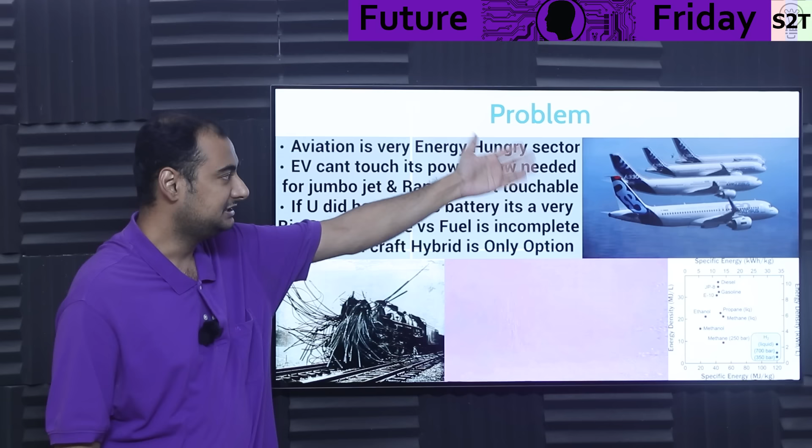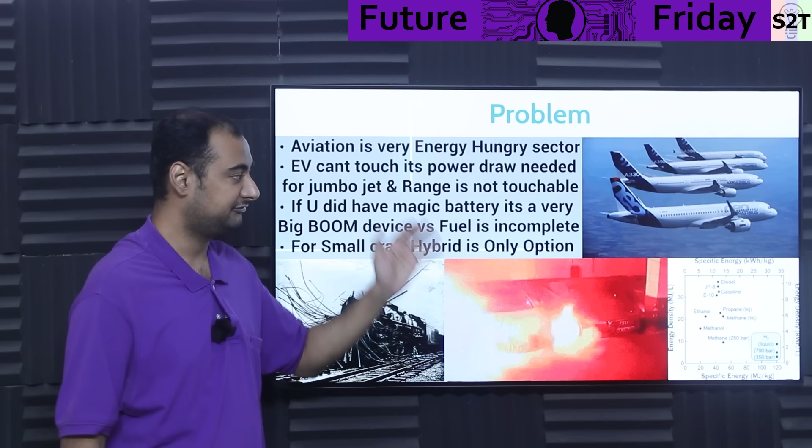These puppies are hungry puppies, meaning they consume energy like there is no tomorrow. Specifically the Airbus A380, it draws so much energy. As of now, electric vehicle on paper cannot even touch this. Meaning if you made it, it will not take off because it will be too heavy. And if you made it light enough to take off, it will not have the range.

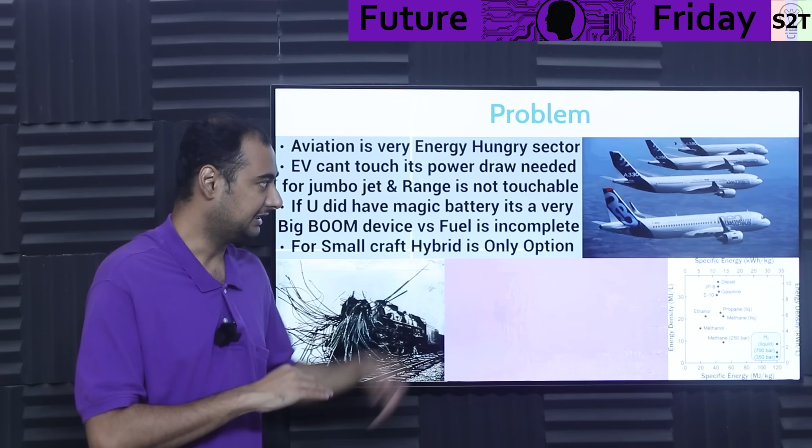So under the known laws of physics and under the known chemistry, as of now, 2025, if you try to do this, it's a nope. You do not even waste time on it. So let that be very clear.

Now, many people will say, what if future energy happens? But here's the deal, you have to understand. Fuel is very energy dense, ludicrously energy dense. The reason we don't go kaput every time we use fuel is simply because it's a half component. You must have studied this in school. Fuel is not complete, it requires oxygen from the atmosphere to work.

Now how do we get that oxygen? Well, we don't get pure oxygen, that's another safety component. Not only is it half, the oxygen is not pure either, you get it submerged in nitrogen. That's why using combustion with fuel is safe enough, even though the fuel is bonkersly energy dense.

How do we know it's bonkersly energy dense? If you put it with liquid oxygen and test it, it becomes a rocket engine. We know it has more than enough power.

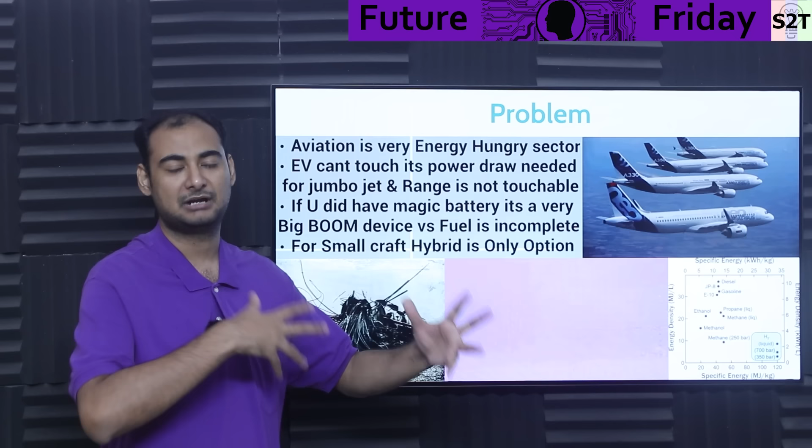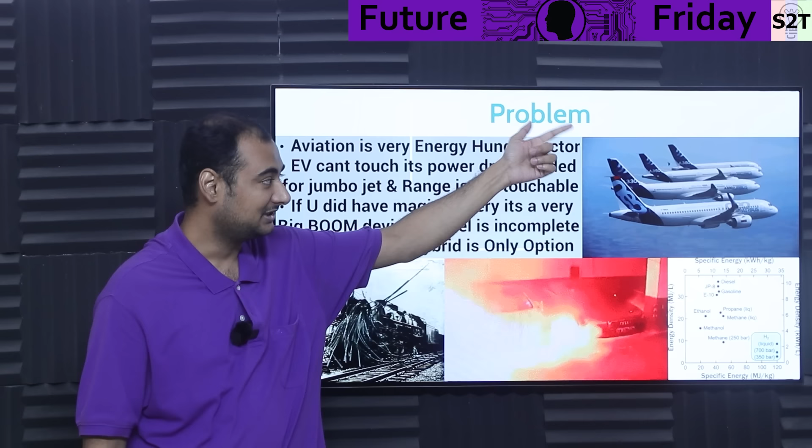Now, whenever you are talking about a magical battery, let's just say quantum capacitors, it will require twice the energy density of fuel. Why? Well, fuel gets lighter as you use it. For example, Airbus A380 can lose upwards of 150 tons, or actually more than that, while it's traveling on its long distance flight. Let that sink in.

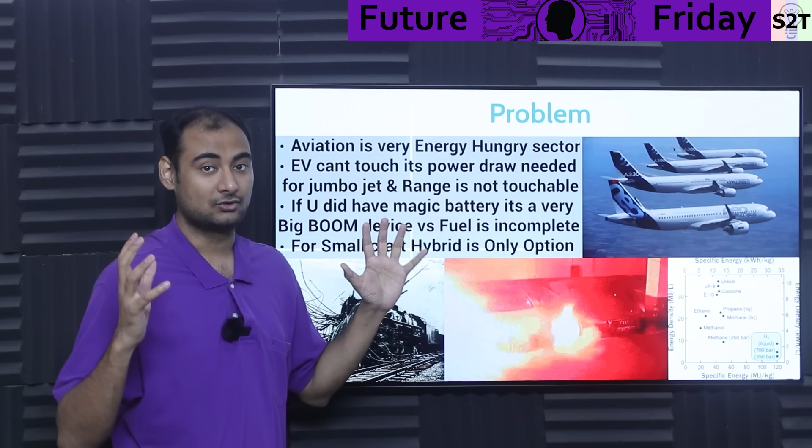This puppy will take off and it will lose 150 tons and then it will land, like, I'm so light. That's the reason why those planes can fly. Batteries do not have that luxury. So if you have to compete with Airbus A380 in terms of its raw capacity and range, it needs to be 2x. Fundamentally, if you can find something that has that kind of energy, it's a very big boomy device, and it's under the known laws of physics.

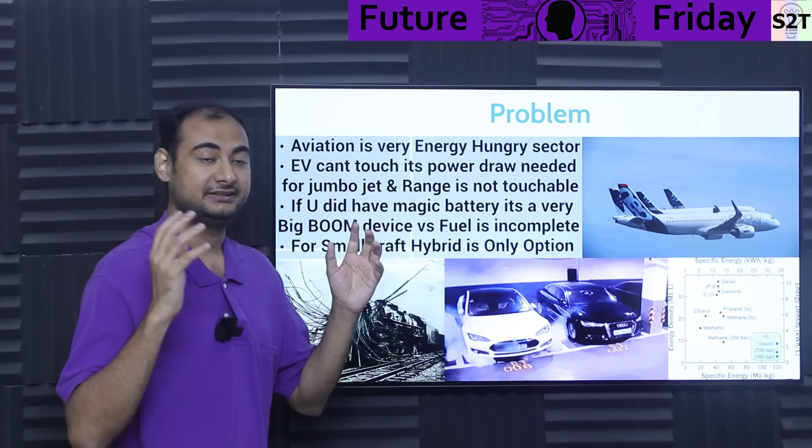If you have so much energy crammed into a small place and it has both components needed, any minor inconvenience will become a boom event. That's why fuel fires are actually manageable by firefighters, but they can't do anything about electric fires, even though electric fires have much less total oomph. It's just that you can't cut oxygen, it has its own oxygen.

It's like, I got this, I will burn, I'll burn underwater, I'll burn for a month. Not even joking. So be mindful, we have learned this the hard way.

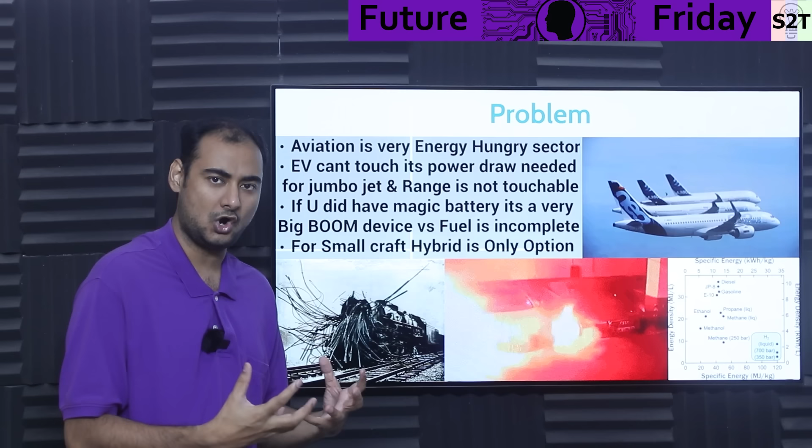Steam trains, right? There was an era, like late 1850s to 1890s, where things happened and people were like, whoa, let's put more pressure, more pressure. They became so dangerous that certain accidents wiped out a station. And it's steam, it's not nuclear, it's steam, but that's the whole law of physics.

The more energy you cram into a position, and the more it has every component that it needs, the more unstable it becomes. So if somebody in future makes a battery like that, I will be like...

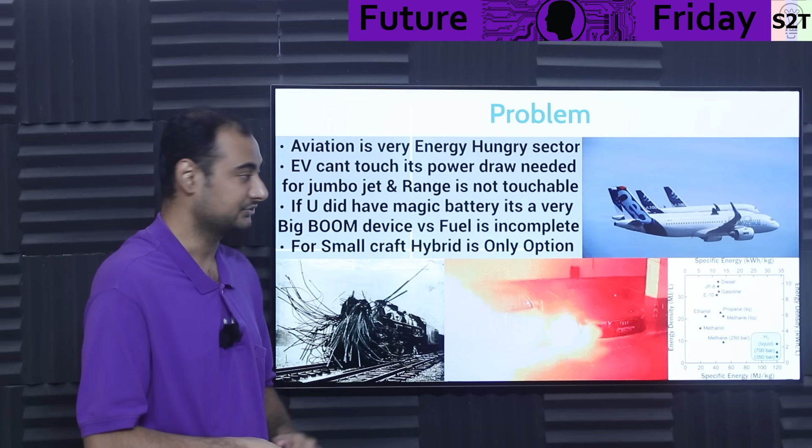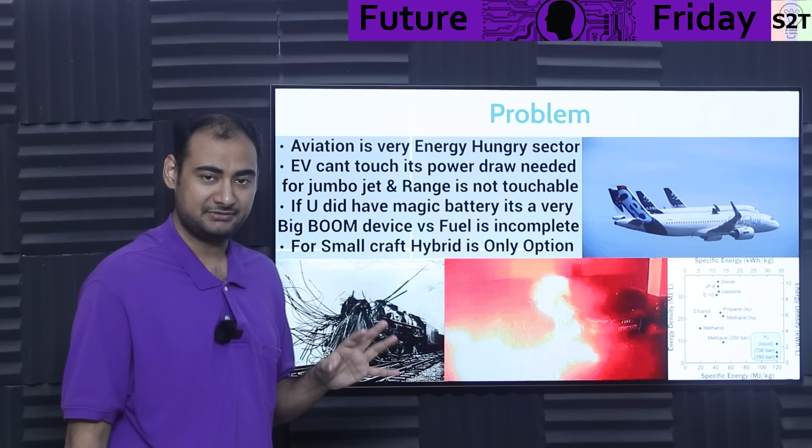So fundamentally, as of now, for jumbo craft we can't touch these things, they're so fine-tuned, don't even think about it. But for commuter craft, basically craft made for regional travel, those we can touch. But again, electric does not have range. With hybrid, we can take care of it.

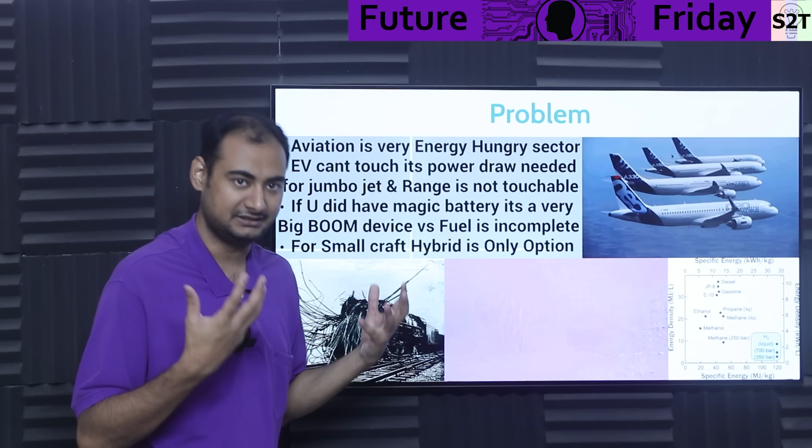Is that statement scientifically accurate? Yes, factually true. You just don't carry things in kilograms, you carry things in liters. How do you think fuel tank capacities are measured? How is fuel tank capacity on a CNG measured? How is fuel tank capacity measured in a hydrogen tank? It's always in liters.

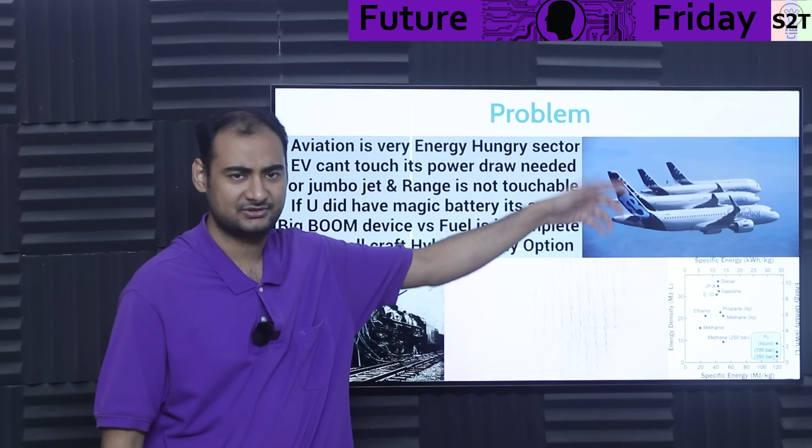So now if you compare that 1 liter, let's say I give you the best hydrogen, which Airbus is trying, not because they want to, but because the European Union said they're gonna ban hydrocarbons. So they're using liquid hydrogen. That has 8 megajoules per liter. That's it. And how much do you have with petrol, diesel? Above 30. JP8 is like around 30, 35. So don't worry about it.

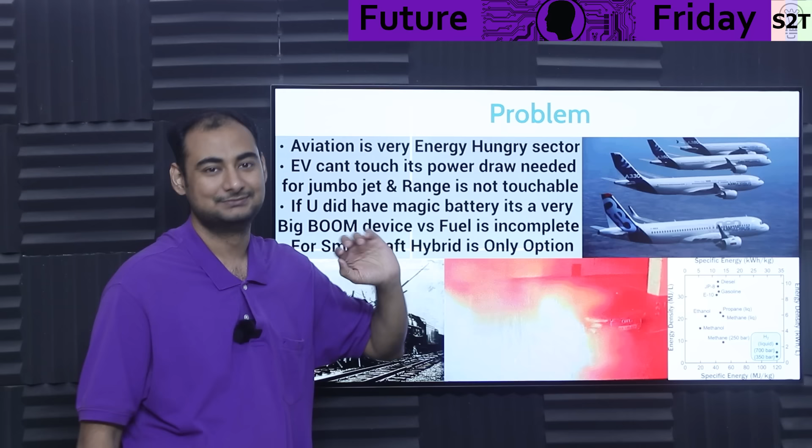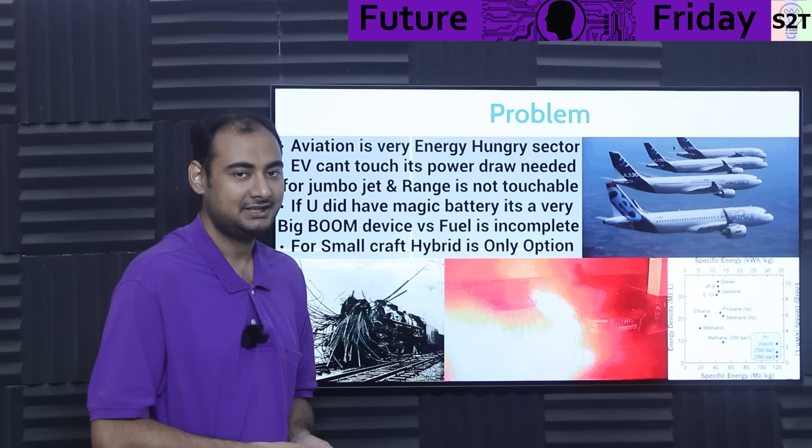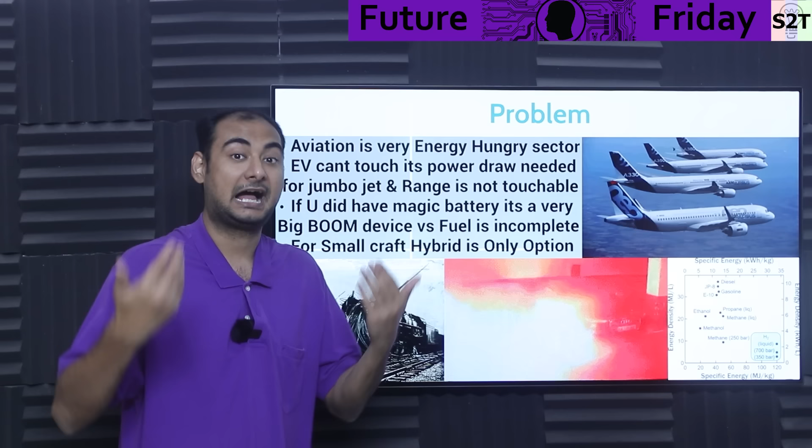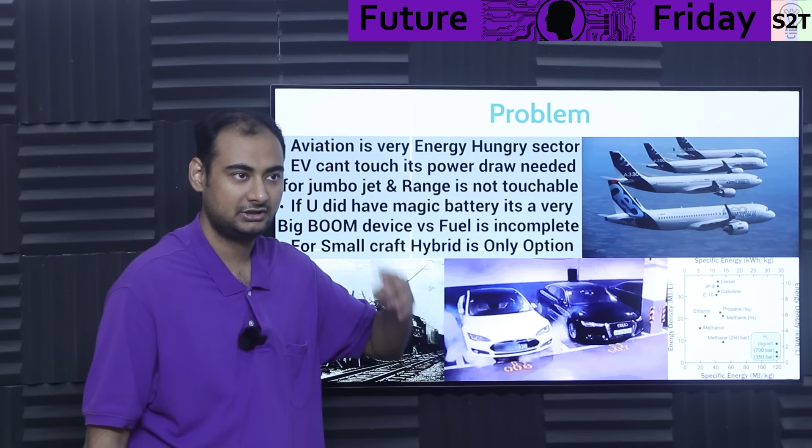That's why you can't fly on liquid hydrogen. That's why rocket companies are like, liquid hydrogen is not worth it, they're all switching to methane. Unless you have carbon-binding hydrogen, the density of usable hydrogen is so low it does not matter. And if you ever think it has higher efficiency, compare how bad the efficiency of a jet has to be so it can be dropped down to 8. And be mindful, hydrogen will not give you 100%. So assume 100% hydrogen is 8, compare how much you have to drop down, and these things have crossed it. So yes, you cannot do it on hydrogen, but if you are stupid enough, I will sell you one. I'll make an engine and sell it to you. It's just that if you are stupid, I'll take your money gladly. So pay attention to this - it's available in every encyclopedia, every hydrocarbon book, every fuel book, every school, every library, every college. We have been doing this since the 1800s.

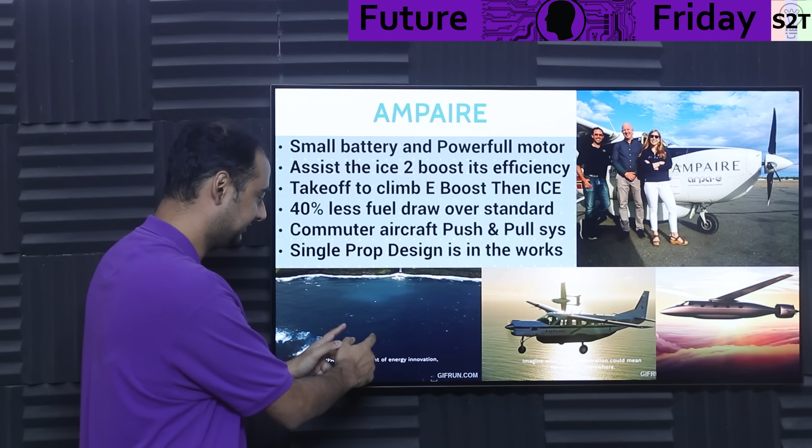So let's look at certain companies' options, how they are trying it. AMPAIRE is a small company that has done it. Basically they took a Cessna and said, what if we add to it? So they took a Cessna and modified it with a pusher and puller configuration. Why? Well, they needed two things.

Now, internal combustion engines are very efficient, let that be very clear - all internal combustion engines made in modern times are really efficient, if you can put it at the sweet spot. It's very sensitive, the sweet spot is very sensitive. It requires precise RPM, meaning the RPM zone for this engine would be, let's say, 1250 RPM. It has to be there, 1215 RPM, it has to be there. It cannot go below or above. And in terms of torque, it will be fixed - it has that many Newton meters, it has to be that, it cannot go up or down. Efficiency will suffer if you do that. It's nigh impossible to do. That's why our real-life combustion efficiency is never good.

But what if you have an electric motor boosting it? Now you're talking about something when you're doing takeoff and climb, which is the most energy-intensive part. The combustion engine isn't just saying 'I got this' - the electric motor is like, relax, stay efficient, we can't buy more fuel, you stay efficient, I'm going to provide the extra oomph you need. And when it becomes the other way around, when you are climbing and cruising, everything is fine, it's reaching a point where it's not efficient - the electric motor is like, you just provide power which is excess, I will drain the power from you via generator and charge the battery, you just chill.

So fundamentally, how much energy savings can they do? They have already built it, tested it. So far they have achieved 40% fuel reduction. That is shut up, take my money.

And again, how the heck can they achieve it? Well, because the batteries are small. If the batteries were huge, the weight penalty would compensate for any gains you can get. So there is a sweet spot, they have to do the calculation. So they have successfully managed 40%. And let that be very clear - if you ever looked into brake-specific fuel consumption of an engine, you will be shocked how efficient our current engines are. We just can't utilize the efficiency.

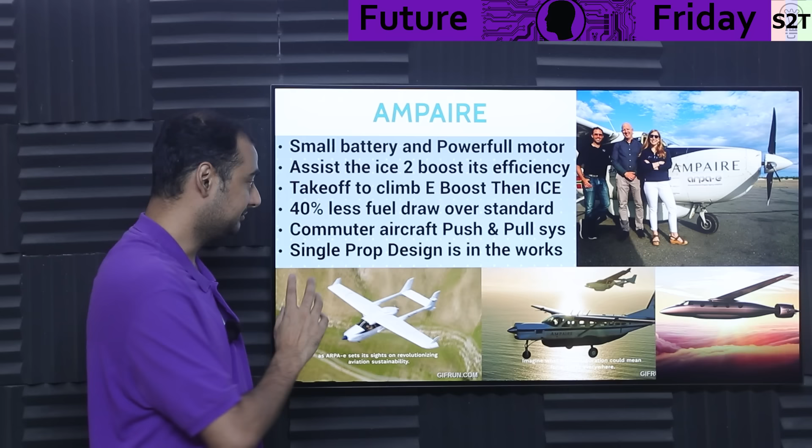And that's why I've been screaming, use series hybrid. So you need 40%, they gain 40% more. Now they are focusing on commuter aircraft, push and pull configuration, and their future design is single prop. Why would you want to go to single prop? If you have a single prop, you have less drag penalties. So they are doing that. How are they doing it? They have an engine and a hollow shaft coaxial motor.

If the engine produces too little, it adds energy to it. So the engine always remains at the optimum point, and you don't have the penalty of having two propellers. Now imagine with two propeller penalty, they manage 40% saving.

How much with this? They are claiming 70%. They have not flown it yet, like they built it but haven't flown it. They're just waiting for verification flight and all that jazz. And this is their future concept where they're going to have a pusher craft design. It will be even more efficient. Can that happen? Yes. So would it have a big enough impact? Yes, it will have a big enough impact.

And be mindful, it also improves safety, meaning if you are in a scenario where the combustion engine konks out itself, you have electric to fall back on. If your electric konks out itself, you have the combustion engine to fall back on. So fundamentally, this would be a bit more reliable. Not too much more reliable, but a bit more reliable.

So this is what they are doing. They have made it. The company, I think, started uploading videos 4 years ago. They have made it, flown it, things are done. They are moving on to the next design. This will be their, I think, actual production one, and that is their future concept one. So this is AMPAIRE.

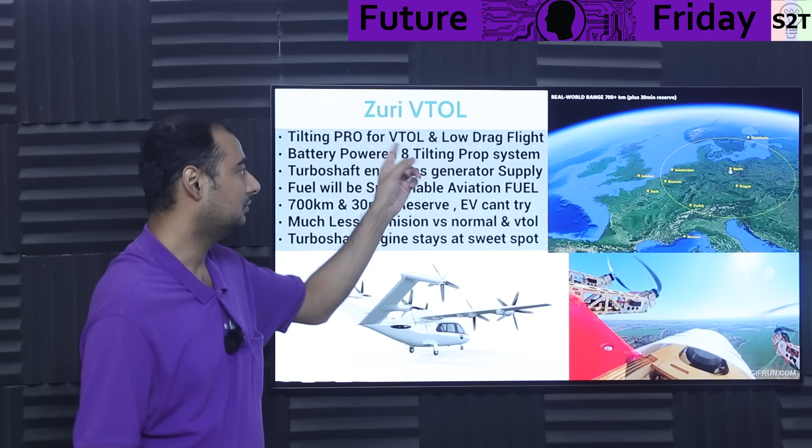So this puppy gives you best of both worlds. It gives you vertical takeoff and landing, and it gives you a low drag flight path. So that's the awesome part. Now they have battery powered 8 tilting prop systems, 8 of them. It's a bit much, but it's their design.

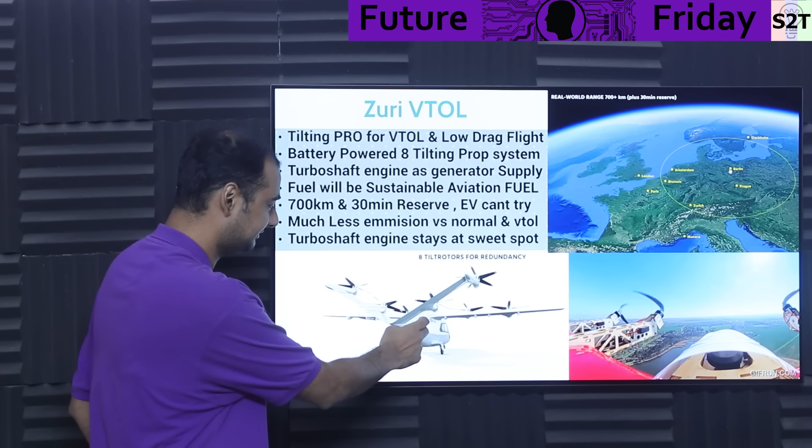And how the heck are they providing power? Well, the battery can provide this power, but again, only for minutes. The turbo shaft engine is the generator supply — so they have a tiny generator. You see the exhaust of it. So that puppy is the main oomph. And because of the fact that they can keep the turbo generator isolated from the load, and the battery is handling all the buffering, they can get much higher efficiency.

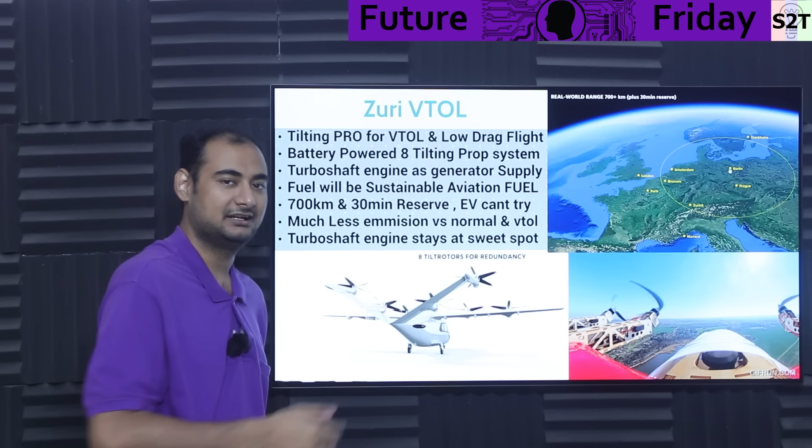Now compared to electric systems, there's no discussion here. This puppy, if it can fly from Berlin, it will land in Amsterdam. So it's a magnificent range, as in 700-kilometer range plus 30 minutes of reserve. Again, all long-range crafts have to have that. Basically, the Airbus A380 never flies in a scenario where, oh, the distance is 2 hours, I'm gonna take fuel for 2 hours — no, it must be 2 hours plus the buffer time, based on the law, based on the regulation. So they have a lot of fuel load.

So this has the same thing, where if, let's say, a location is 600 kilometers away, it's not that after the fuel is low it's emergency, land, mayday — no. It's like, yeah, we have time. So 30 minutes reserve. An EV cannot even try that. Let me be clear, you can make an EV that can fly, it will look almost like this. The moment you talk about range, no.

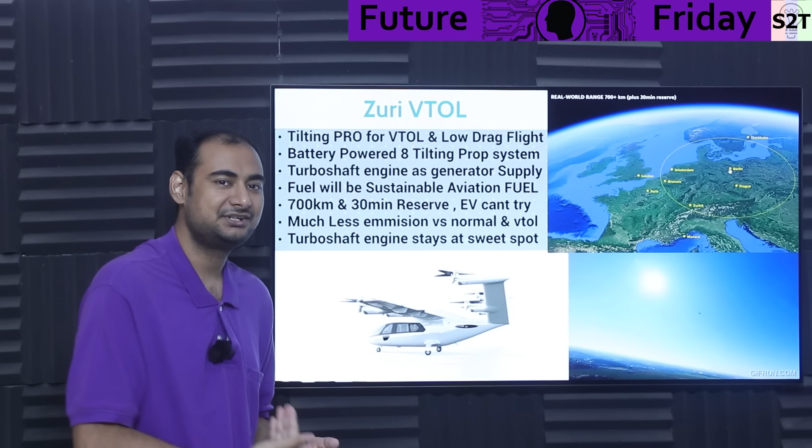Because batteries have made amazing progress when it comes to kilowatt — basically, the power rating is bonkers awesome. Motors are bonkers efficient, that part is sorted. The moment you touch capacity, it's like nope. Fuel is like, bruh, don't even compare.

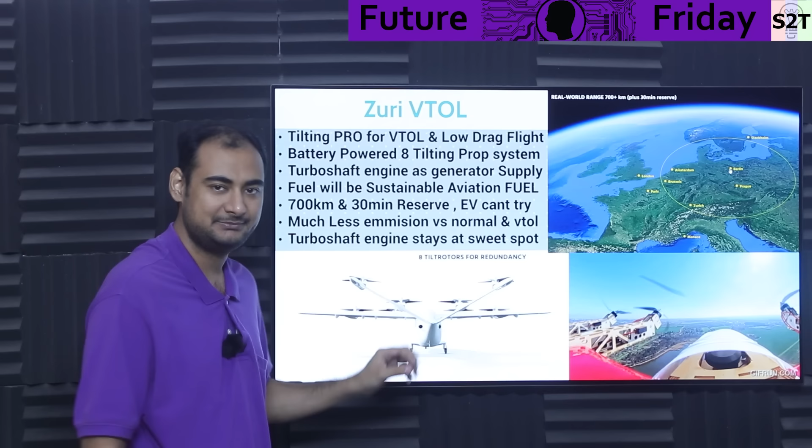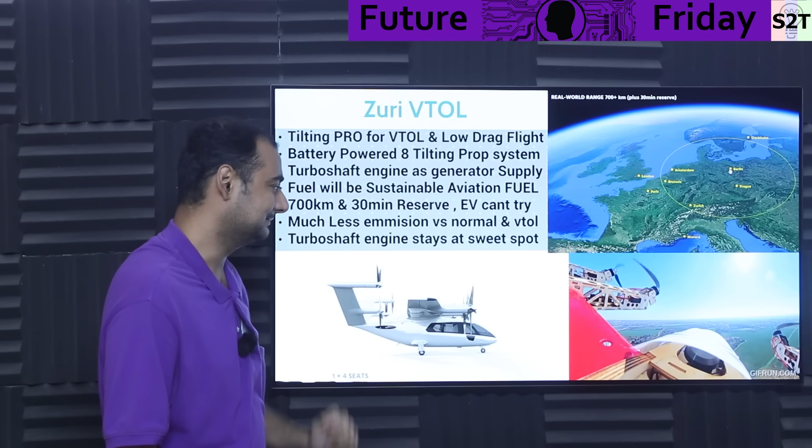So fundamentally it's there, and it has much less emission. Same way as the last design, fundamentally much less emission. If you move that many people using this aircraft, it will have less emission, and it will give you VTOL. So that's the whole point. The turbo shaft engine stays at the sweet spot. So again, long range — like it's actually long range travel. So that's an awesome addition they are doing.

Then we come to Electra. This is a bit different design, and they are like, no VTOL, we are not doing VTOL — again, that adds mass. So they are like, what if we do ultra short takeoff? Meaning you take off from the runway and just, yeah.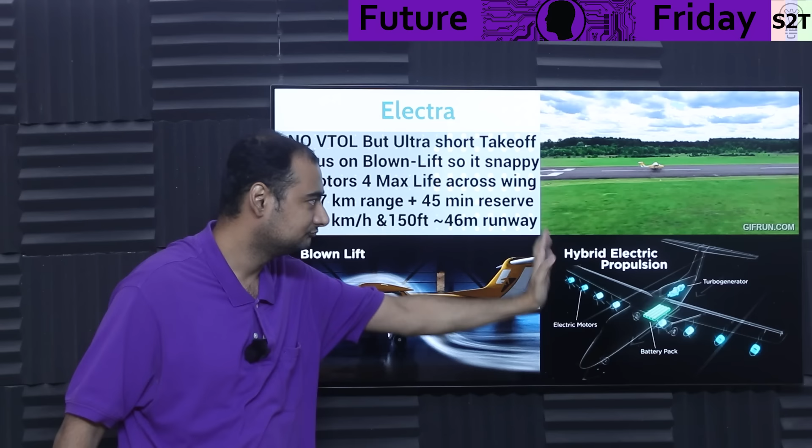Done. Basically 46 meters, they're like, nope. To give you context on how small 46 meters is, it's inside a football field, and most airports generally have taxiways longer than that. So basically this puppy is like, why taxi to the runway?

What if I converted the runway into taxi? So how the heck can they be this snappy, so to say? Well, if you design the craft, you have certain vectors to control. One of the vectors is blown lift, meaning if you are blowing air over the wing, it will create lift. Lift is proportional to relative velocity. Let that be clear, it has to be relative.

When the wing is here, air is flowing. It does not matter if it's moving on the ground or not, the wing is independent of that. It only cares about how the air is moving around it. Relative, basically it's almost like relative humidity.

So if you have a plane that is lightweight enough and has good lift, and wind starts blowing very fast, it will just take off. Direct vertical takeoff, it has happened. There are a lot of YouTube videos on that. So it's what we call blown lift.

Now all propeller crafts generally have that, where they can create lift because they are flowing air over the wing. So this puppy optimized that, and that's why they have 4 of them. They are utilizing the whole wing chord, and they are just oomping it, which allows them to have this hyper snappy takeoff.

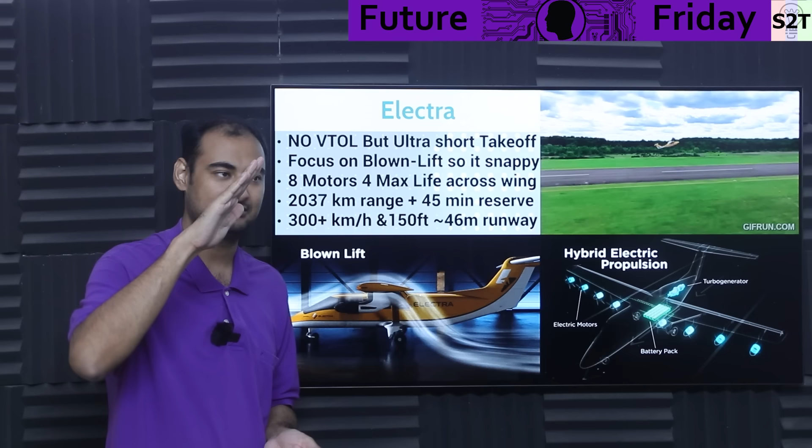It's just like, yoy. And this also allows very short landing, simply because they can drop the speed too much and not worry about falling from the sky, because the wings are like, I got you. Why do the wings got you? Because the rotor is like, I got you. So this is the design philosophy they are focusing on.

So they do not have to worry about tilt rotor, and they do not have to worry about needing this runway and all that. They're very snappy. Like, bruh, flyover is like, fly away from flyover. That's not an issue.

So 8 motors, really high powerful system. How much range? This is where it gets sweet. 2000 kilometers. Now we are talking some serious aircraft, like this is aircraft kind. At this point in time, you're not gonna have a discussion.

This is a freaking aircraft with a ludicrously small takeoff distance, and that is with 45 minutes of reserve. Again, tilt rotors take a lot of energy, this is like, let's bypass that. So this puppy can do that.

What is the speed? 300 km per hour. Now that's a bit slow, especially compared to jets, but more than good enough. And again, you're not driving 300 km per hour even on the autobahn. I know some people can try that. Most cars can't sustain 300. This is like, bruh, I can sustain this for 2000 kilometers.

So there's a difference. This is Electra's approach. Again, same turbo generator, turbo generator stays as the sweet spot. What about the motor drain variability? Battery is like, I got you.

So turbulence is like, motor have to fight for it. It's like, I got you. Battery is like, I got you. And turbo generator is like, I got the battery. So this is how it works.

And again, if they focused on shortening the runway part, think about it, it's like the first sign is like, yeah, I'm out. It's like it gets bored of the runway. So it's Electra.

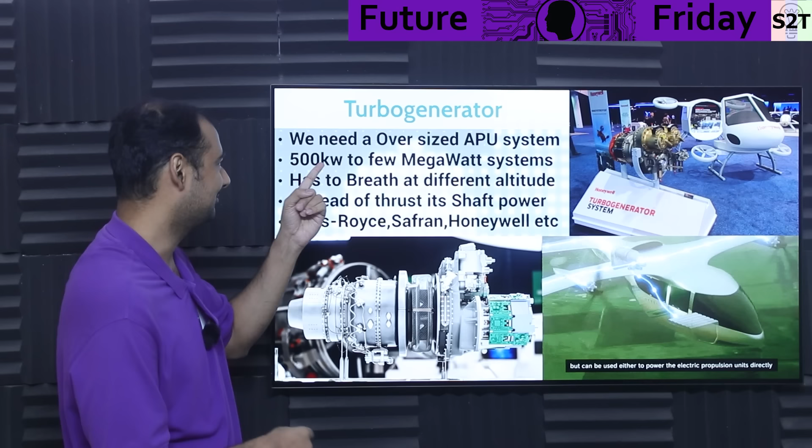Now we are talking about the turbo generator. Now, thankfully, the aviation industry already had this problem. They call it APU, meaning when you're talking about an aeroplane, how the heck do you cool it down? Assuming you do not have auxiliary services connecting pipes to you, how the hell do you cool it down? You have a small generator, which we call APU.

Now, why small jet engines? Because a small jet engine is actually startable with basically battery power. You cannot start the main engine on battery power. So the tiny jet engine starts with battery power, that starts, spools up, creates a lot of pressure. That air pressure is now utilized to spin up one of the primary engines. So that's how normal commercial aviation works, they always have an APU system.

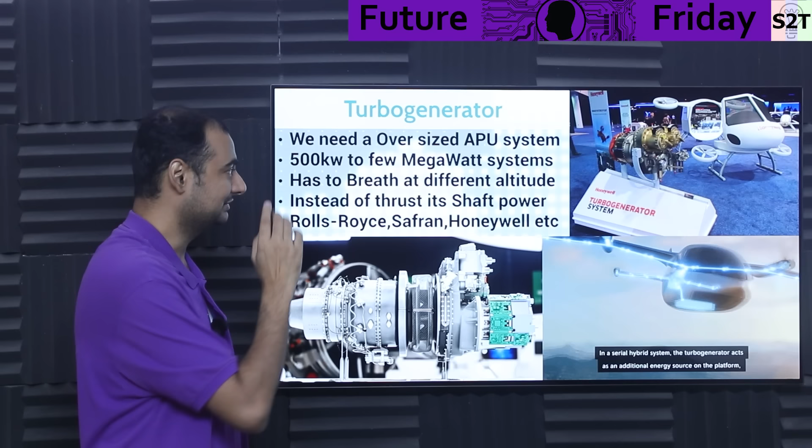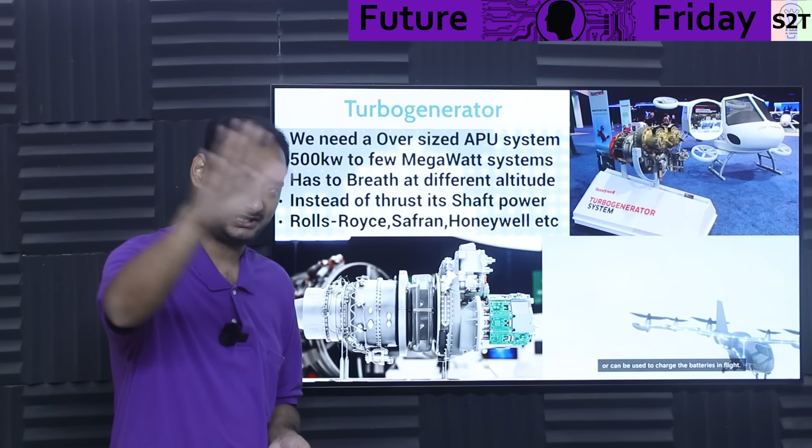If both engines kaput themselves, APU will take up the load. If you are on a taxiway waiting, APU will take over everything. So APU is the one that takes care of most things. Basically the plane lands, once you coast out, engines start to turn off, especially once it's reaching an area where people would be around. So engine goes off, but you still need systems like cooling and other electronics. APU is like, I got you, fam.

So we took APU and thought, what if you make it run all the time? Because APUs are really powerful, really robust, since that's the backup to the main engine. So they have very big, very robust, solid components. We just have to make them stable for long duration operation.

Generally, APU is not supposed to be running, especially in flight. In flight, you're not supposed to use APU, your main engine is like, I got you. If you have an engine failure, you may want to use APU, but something bad has happened if APU is on during flight. Maybe some planes have a different way, but most of the time, if APU kicks on, it's like RAT deployment. It's like, no, you don't want that.

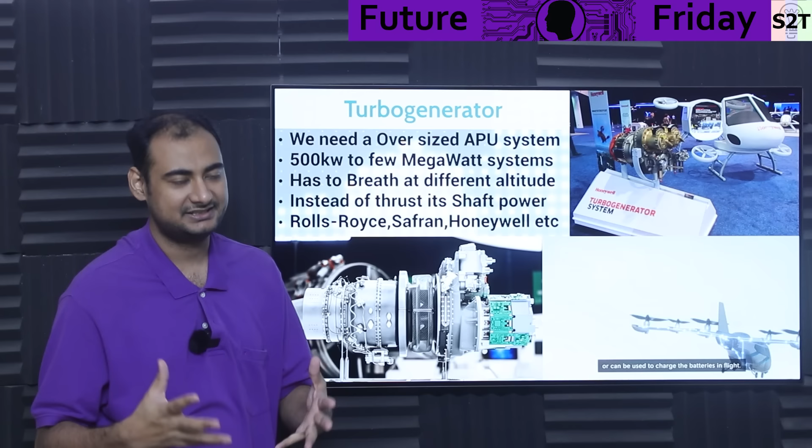So what kind of power rating are we talking about? 500 kilowatts to a few megawatts. I've seen the biggest design around 2 megawatts. Is that a lot? Not really, but it's decent. Now, you have to understand the engine has to be designed so it breathes well at all altitudes. And the core aspect with this is that it has to create shaft power rather than thrust.

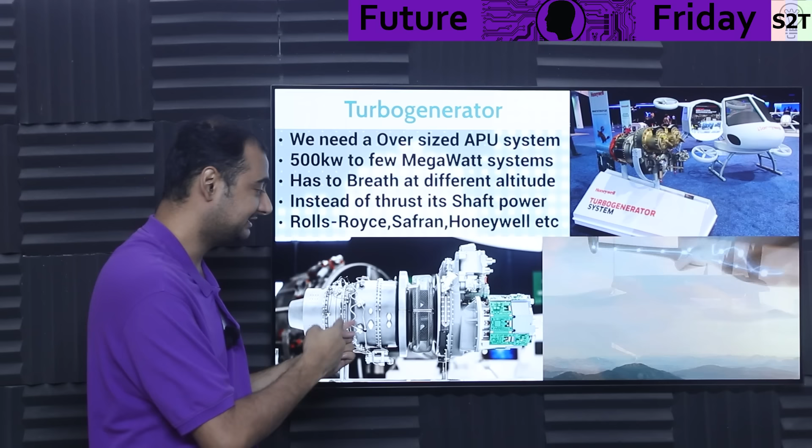Whenever you're talking about those big engines, they push air through them, that's designed for thrust, that's why it's a turbofan design. But here you want shaft power, basically you want the generator rotor to spin. So it has to have a different philosophy.

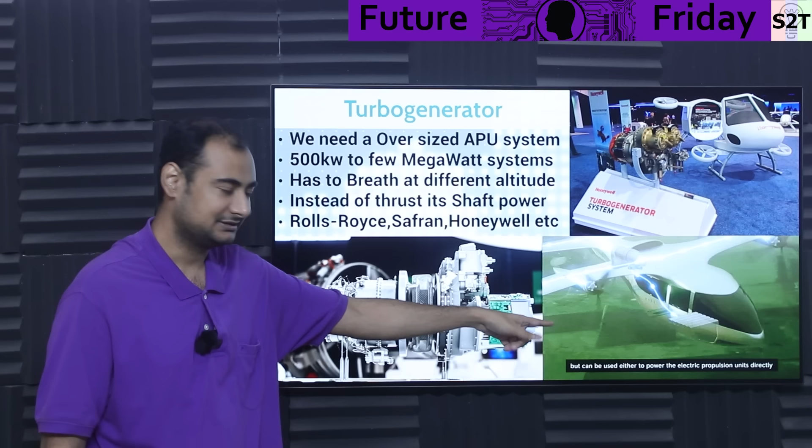Now, thankfully, we have technology known as helicopters. They utilize this, helicopters have designed jet engines that are optimum for shaft power, not thrust. So this company, Safran, basically copy pasted their helicopter engine into this and said, okay, we'll put a motor generator unit here. So that's what Safran did. Rolls-Royce is doing another engine. They have that, and Honeywell is also doing that, and Honeywell is already experienced with APU units. So they're like, we're done, we're good, we're sorted. So all of them are just fine tuning it, nothing too major.

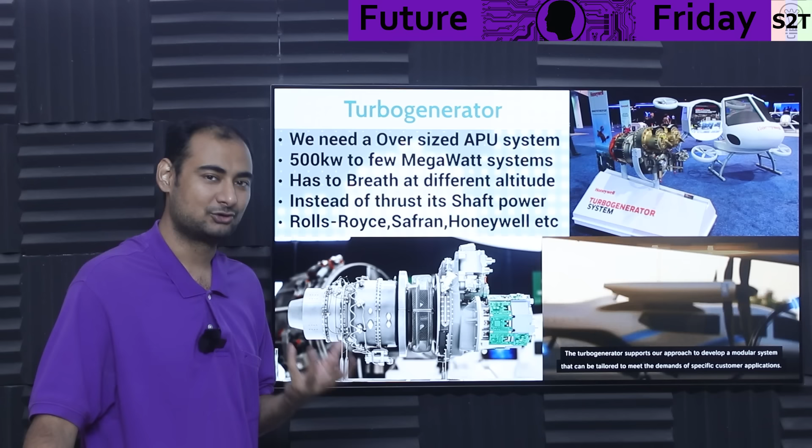All you have to do is, if it's a brand new engine, it has to be a helicopter engine. If it's a modification of an APU, you just reinforce the components so it can sustain those loads, and remove the air compressor unit, since you're not expected to use compressed air in hybrid systems. So that's the difference.

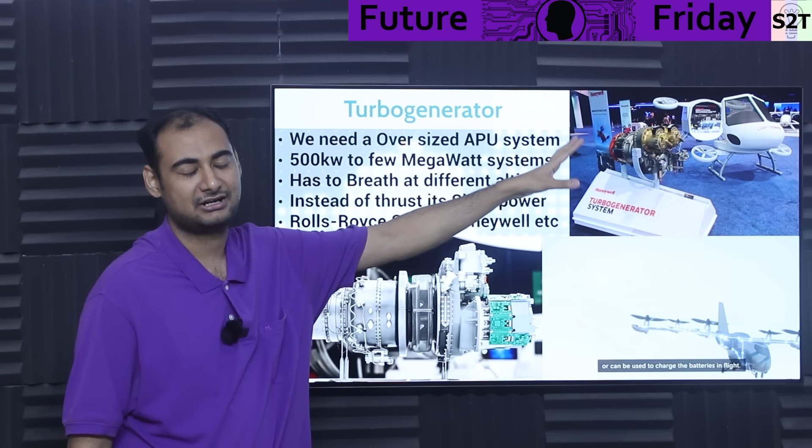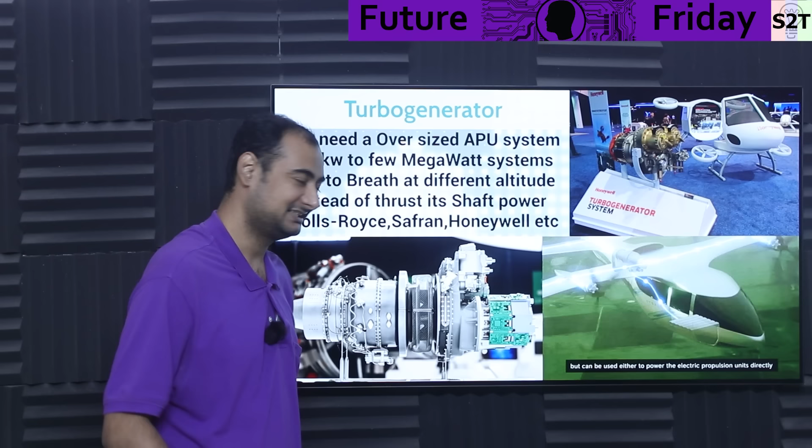And they are showcasing what kind of designs they can utilize. Rolls-Royce is also very smart, it's like, yeah, if you want to smoke hydrogen, we can sell you that. But they're very clear, if you are silly enough to buy it, I'm smart enough to sell it. Let that be very clear. They know for a fact that if you try with hydrogen, it will fly, it will give hipsters some orgasm, but over time you'll be like, yeah, we are burning so much money and getting so little range. Now we understand why the USA Air Force actually built a hydrogen-based fighter jet, and then why they cancelled it.

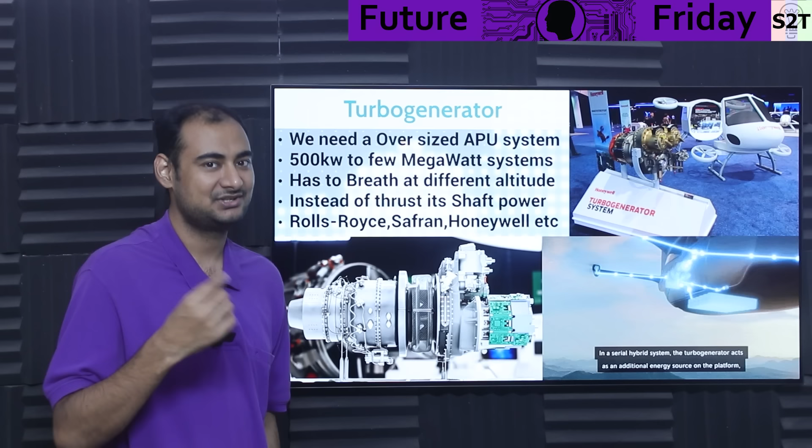The Soviet Union built a jumbo jet on liquid hydrogen, they cancelled it, it's now in a museum. There's a reason for that. Let's just see, we always do the same thing. Like in 2020, Germany's going to smoke weed and launch a hydrogen train, in 2022, they're going to cancel the hydrogen train because it bankrupted them. Same thing will happen here. So let that be very clear, if you are stupid enough to buy hydrogen, I will be smart enough to sell it to you. Heck, I'm making an engine, I will sell it to you. So that's the whole point of it, turbo generator.

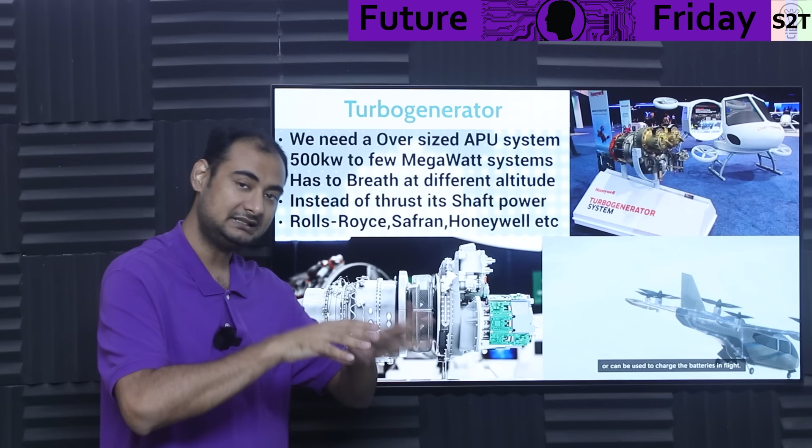So do not focus on the fuel, and ideally we'll use what we call sustainable aviation fuels. Even more ideally, seaweed biofuel.

So this was my presentation on turbo generators, and hopefully, the series hybrid topology of electric aircraft. Hopefully you liked it and learned from it.